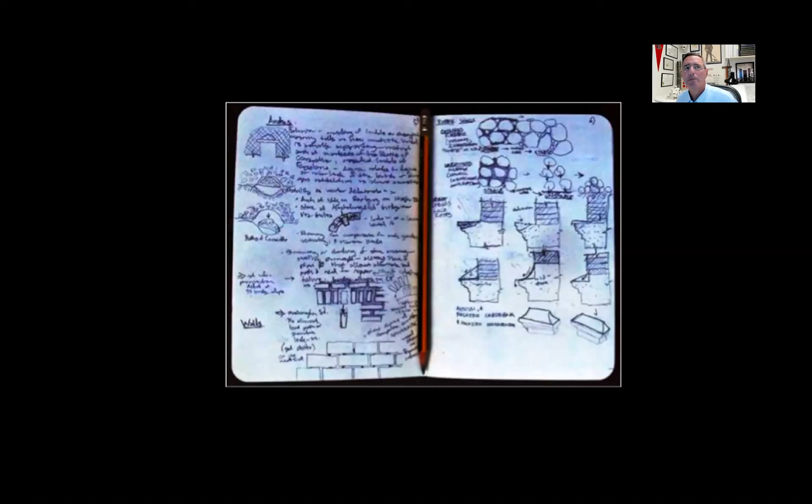His 10-month-long Rome research project was comprised of hands-on study of approximately 24 historic buildings in Italy, ranging from 1st century BC to early 20th century, including buildings by Bernini, Borromini, Moretti, and others. His hands-on research, often on scaffolds of buildings under restoration, diagnosed successes and failures in durability of construction detailing to derive lessons and general principles for designing buildings more durably, and hence more sustainably, today.

For the past 25 years, Matthew's practice at Simpson Gumpertz & Heger in Boston has focused on investigating and diagnosing causes and consequences of building envelope and structural problems in historic buildings, and designing sensitive and appropriate repairs and restorations to solve those problems. Matthew holds a BS in civil engineering from Tulane University, a master's from the University of Pennsylvania, and an MS in historic preservation from the University of Pennsylvania.

He's a fellow of the American Academy in Rome, a recognized professional of the Association for Preservation Technology International. Matthew has led several envelope investigations and historic design efforts on numerous historically significant buildings over the years, including National Historic Landmarks.

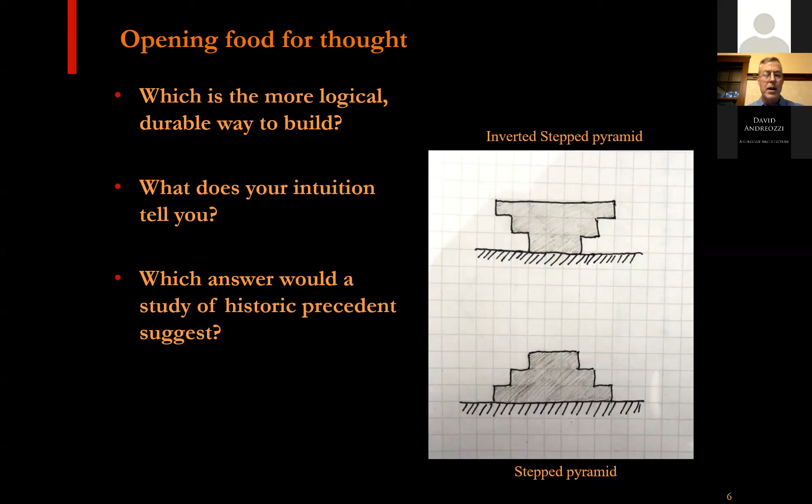Just a little opening food for thought to get the wheels turning. Here are two basic schematic diagrams: a step pyramid, or a wedding cake you might call it, on the bottom, and an upside down or inverted step pyramid on top. Which of these two do you think is the more logical, durable way to build? What does your intuition tell you? I think intuition counts for quite a bit. And which answer would a study of historic precedent suggest? Or more simply put, if you were to look back through the history of architecture, buildings in different countries and regions, which of these two do you think you'd see more of? So we're just going to let that steep, let that marinate, and we'll come back to that later.

Vitruvius was in my project title and was really the inspiration for my year-long research project on durability in Rome. I know this crowd knows Vitruvius well and doesn't need an introduction, but just as a bit of review: this was Marcus Vitruvius Pollio. He was born and died in the 1st century BC. We think of him today as a Roman architect, and of course he was, but it's important to remember that the hat the architect wore in ancient Roman times was really quite broad by today's definition. The Roman architect encompassed all the disciplines we think of today as architecture, engineering in its many forms: structural, mechanical, environmental, military. It also included urban planner, master builder. So there was really quite a lot to being an architect 2,000 years ago.

And of course, he famously wrote De Architectura, on architecture, around 25 BC. We know it very well, often called the 10 books today, although it was one book essentially with 10 chapters. We know it so well because it's the only surviving architectural treatise from classical antiquity, either Greek or Roman. But we know there were many others, and he actually describes them to us. He tells us he pulled the best from each of those works. So I think if one were to survive, it was really perhaps the best one, since he does survey, read, cover, and include highlights of all the others in his work.

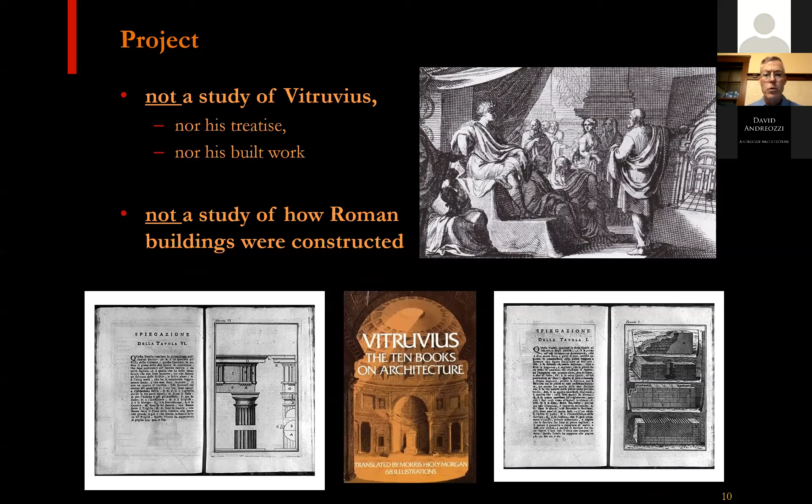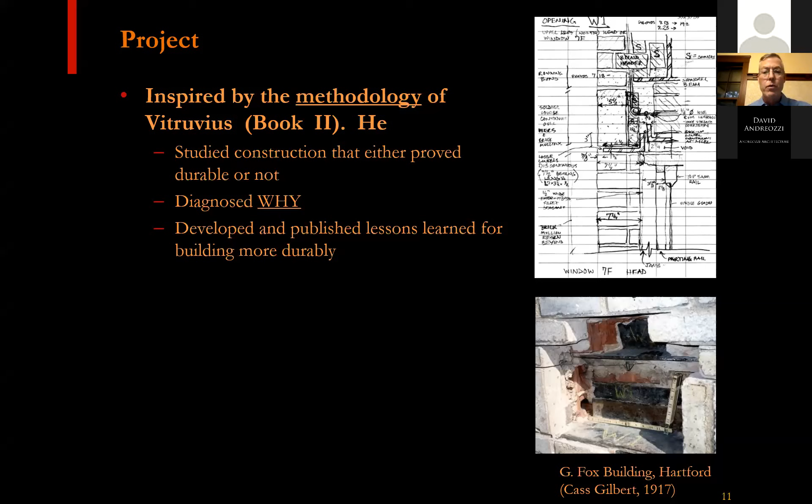So my project in Rome wasn't a study of Vitruvius per se, or his treatise, or his built work. And it was not a study of how Roman buildings were constructed, but looking at those was really a means toward the end. I was inspired by the methodology of Vitruvius, in particular Book 2. What he did and described in Book 2, if you remember reading this in college, was he studied construction that either proved durable or not durable, and he really put on his detective hat to diagnose why. From those lessons he figured out, he developed and published, in the manner of the day, scrolls presented to the emperor, lessons learned for building more durably moving forward, lessons for future generations. So I found this really inspiring.

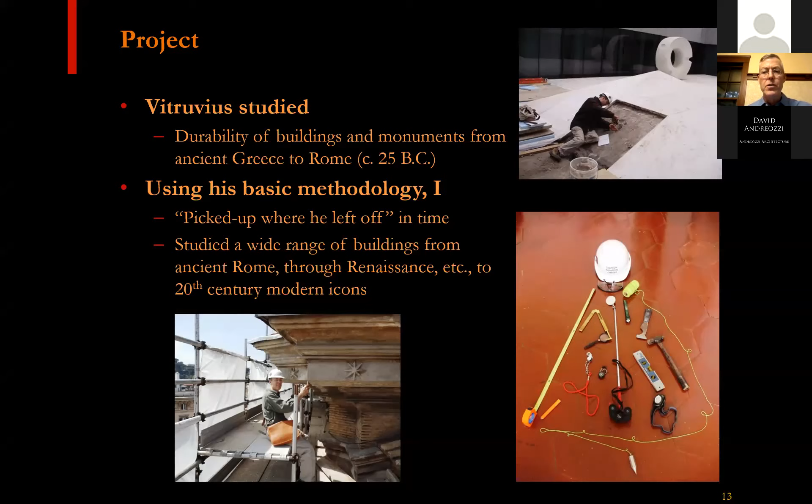So what I tried to do in my research project was basically use the same approach that Vitruvius did, and pick up where he left off in time. His work and his treatise concluded in the 1st century BC - that's where mine began. I picked up where he left off in time and looked at buildings from classical antiquity all the way through medieval, Renaissance, Baroque, early modern buildings, even early 20th century icons, looking at them closely, diagnosing why they had proven durable or not.

So I think, being here in Boston and New England, where this chapter is based, we're pretty fortunate in that it has such a rich architectural history for the US. We're looking back at buildings that are 200-some-odd years old in a lot of cases. But of course, Rome is a whole different order of magnitude and timeline in terms of building history - you're talking a tenfold increase in buildings that span 2,000 years roughly, rather than 200 years.

A different climate and a different tradition of construction and different predominant materials meant it was a great opportunity to test some of the theories I'd developed after practicing for 15 or 20 years, to see how they hold up in a different climate and a different tradition of building.

For those who know the Academy, I think my research project was a little unusual to a lot of the fellows I was there with. I had a hard hat and was up on the scaffold measuring things, while a lot of them were in libraries researching manuscripts for hours and hours. It was so different from what they were doing, and they were kind of fascinated by it.

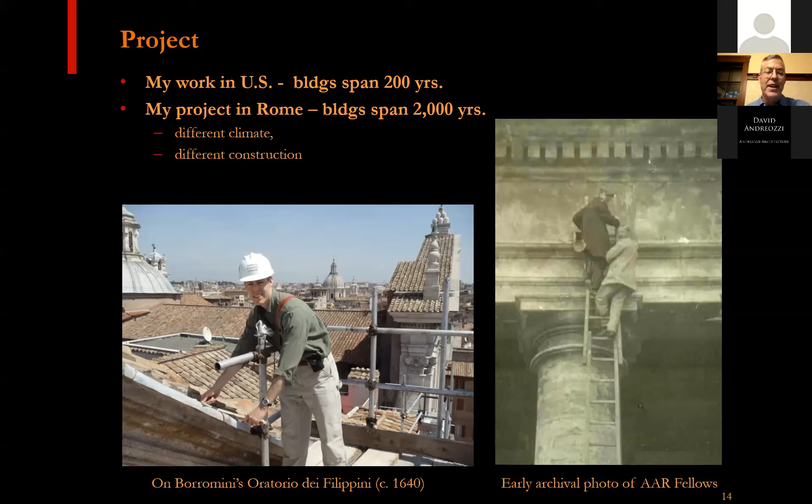But I pointed out to them that if you look at old photos of AAR fellows at the Academy—there's one from the Academy archives—they were really doing what I was doing. They were climbing up on ladders and scaffolds, measuring moldings. So to me, it was kind of a back-to-the-future type of project.

I couldn't bring all that equipment over there for a whole year and keep it away from my colleagues at work, and I wasn't about to ask permission—I certainly wouldn't have received permission to make openings in 2,000-year-old buildings. So how was I going to do this project?

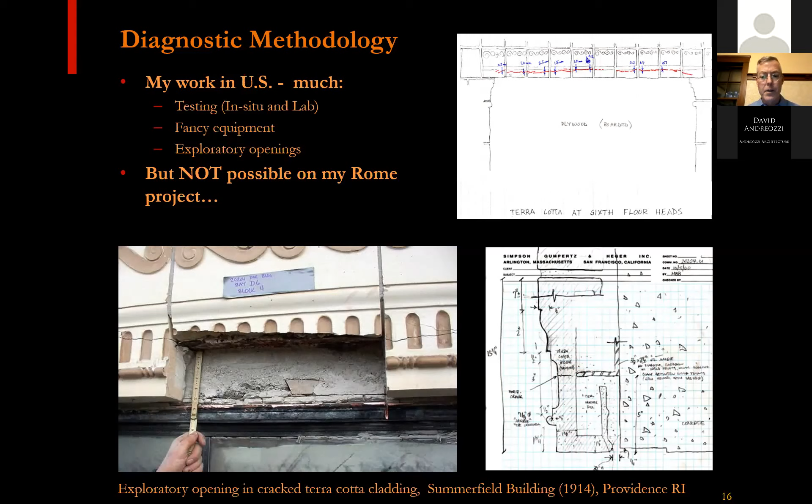Really, the methodology was like Vitruvius—kind of back to basics. It was a lot of looking really closely: looking, drawing, thinking, looking, drawing, thinking. How does this work? Why did that fail? How did this hold up and stand the test of time?

One of my partners, who teaches a lot of us how to use non-destructive testing equipment at SGH—some very sophisticated, expensive gizmos—likes to remind us that the two best tools you have on any investigation, you always have with you: your own two eyes. Just looking very closely and thinking about something is incredibly valuable.

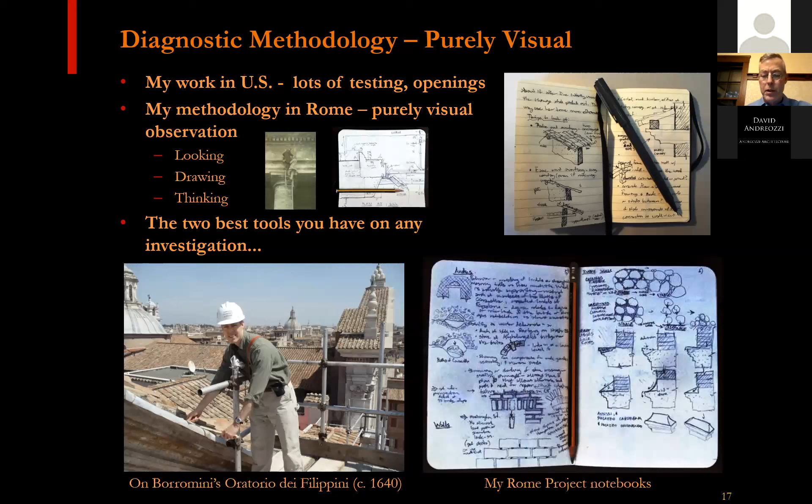I think there was really a need for this research on durability, and still is. In preservation, part of my background, there's a lot of research at the micro scale—the tiny scale of microscopes, looking at materials up close and understanding slight differences in chemistry. And there's a lot at the macro scale: what are the character-defining features of this building or even this whole district? But there's not enough at the intermediate scale.

By the intermediate scale, I mean the scale of a window, a corbel, a bracket—the elements of how you actually put a building together, how wall meets window, how roof meets wall. That intermediate scale is really critical, and in my experience, that's where buildings really either do well or fail in terms of their durability.

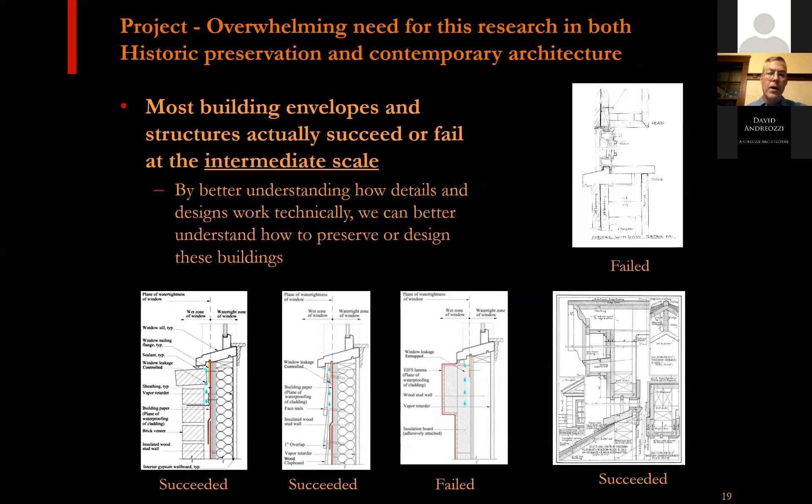To make that point, here are a handful of different window details. At a glance, it wouldn't be totally obvious why roughly half of these succeeded and roughly half failed miserably. So it's important to look really closely and get into the nitty-gritty of how you bring different materials together, how things lap, how things get integrated, how things meet with respect to the weather.

Another reason I felt this was really important is I see us in the midst of a durability crisis in architecture, engineering, and construction. There's really a pandemic of enclosure failures that I see from high-end, very expensive projects to the low end, from renowned to unknown architects, coast to coast—and many are failing immediately or very shortly after construction.

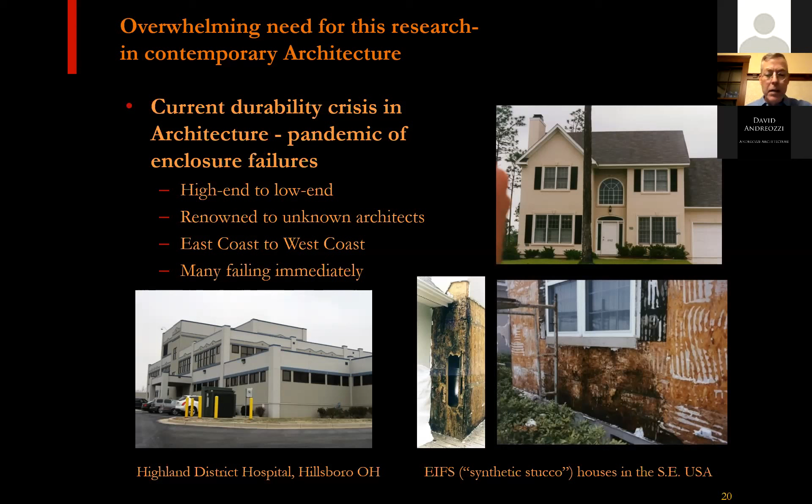So anything from McMansions and spec-builder EIFS houses that you see here on the right from the southeastern US, to this regional hospital in Ohio that I was investigating that was leaking badly and had a lot of problems even before they were done punch listing it, to the very high end, famous architects, significant commissions and talented teams of consultants too. It's not my point to blame these, it's just to say this is such a widespread problem that is spanning the entire gamut of big projects to small and everything in between, coast to coast.

Another reason I felt this research on durability was really important is there's been so much focus, and rightly so, on sustainability over the last 25 years. And in my mind, durability is absolutely fundamental to sustainability. So we can't really talk about designing and building sustainably if we're not talking about designing and building buildings to last 100, 200, 300 years.

So if you look at a building that's a couple hundred years old, like Palazzo Braschi at the upper right, or maybe around 500 years old, like the Villa Medici at the lower left, think of all the embodied energy and material that has been saved by not knocking down a building every 50 years for 200 or 500 years and starting all over again, quarrying or manufacturing new materials and transporting them to the site and erecting them. Think of how much you're saving.

One really good study looks at just this, looking at sustainability from the broader lens of the total impact on the planet of knocking down a building and building a super energy efficient building to replace it, versus making some improvements, not getting it to the greatest performance energy-wise, but keeping what you have. Kind of the greenest building is the one that's already built notion.

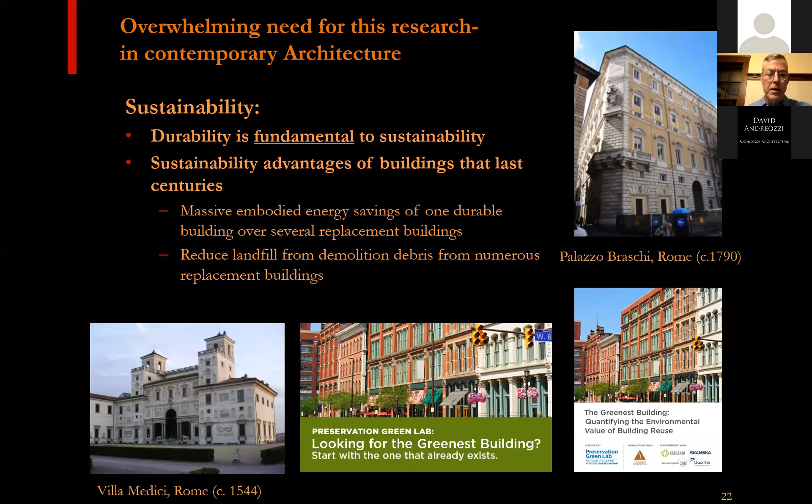So clearly we have this crisis in durability, but why? It's despite the decades-long emphasis on sustainability. So I see several reasons for this.

One is that aesthetic innovation, kind of the constant push for aesthetic innovation in architecture, forces us to innovate in our detailing. We want something to look a different way. We have a new material, a new membrane, a new frame element or whatever coming out, and we have to figure out how to detail that for the first time. It's possible, but certainly not easy, to get it right when you're detailing something for the first time. You're just starting to get to know a material or component, or how to bring a couple different unknown materials or components together. So that's understandable, but I think we're forgetting some fundamentals, first principles, and real basics of designing for durability. That's really what I'm going to try to cover today.

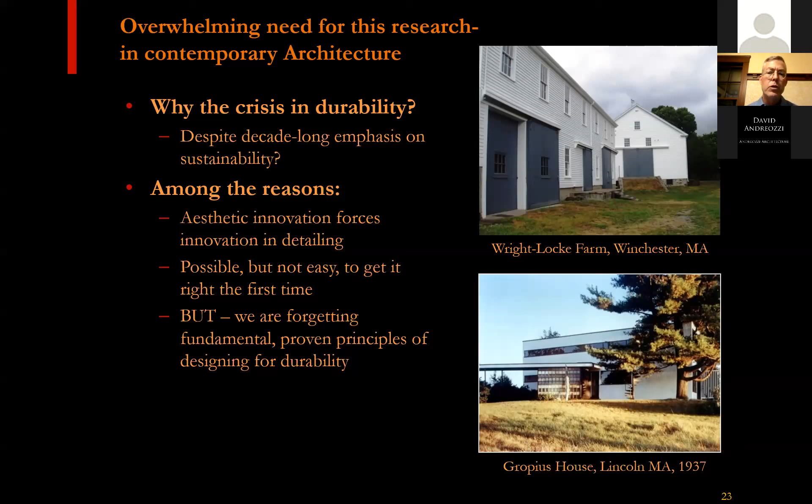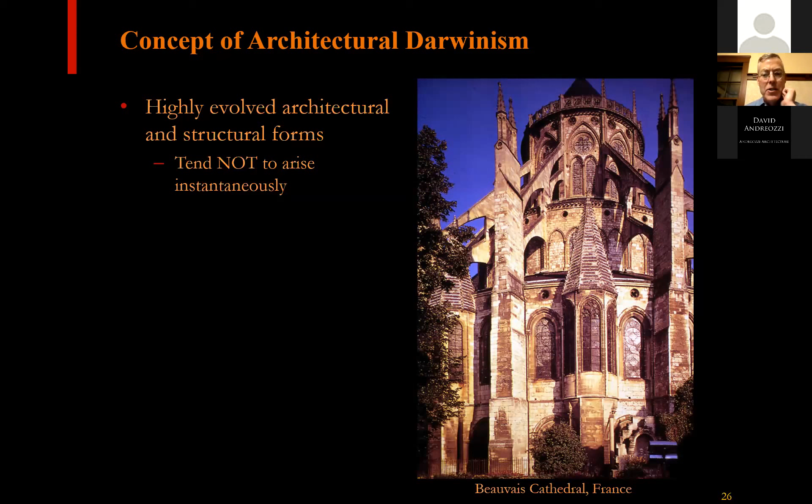So why is that? Well, in my mind, this comes back to this concept of architectural Darwinism. I've used that term to describe this kind of process. A highly evolved architectural or structural form, like a Northern French Gothic cathedral, you see Beauvais here, does not tend to arise instantaneously. It's not this genius lightning bolt idea that comes out of the sky straight into the hand and through the pen and onto the paper. That's not really how highly evolved architectural or structural forms happen.

What tends to happen, how you get a highly evolved form, is more like a gradual evolution, a series of baby steps that eventually culminates in that. So we don't just go straight from squat medieval structures to Beauvais Cathedral. There are some early Norman buildings that are starting to open up, get less solid, less massive, get a little bigger. They come up with the pointed arch as opposed to the Roman arch.

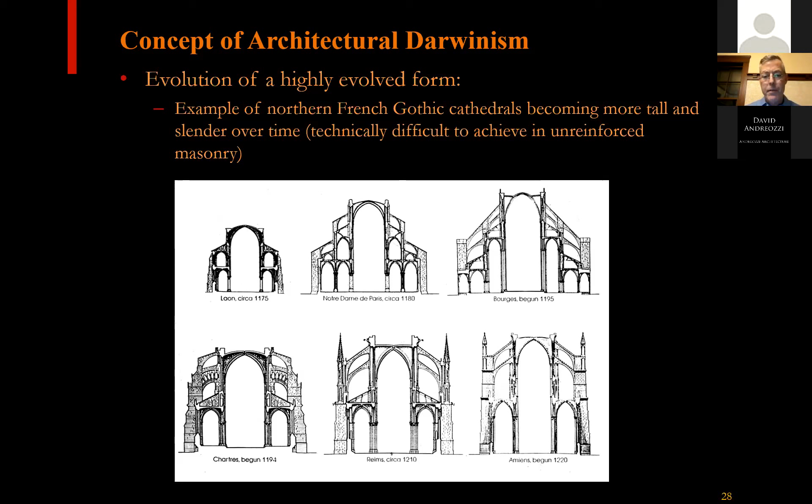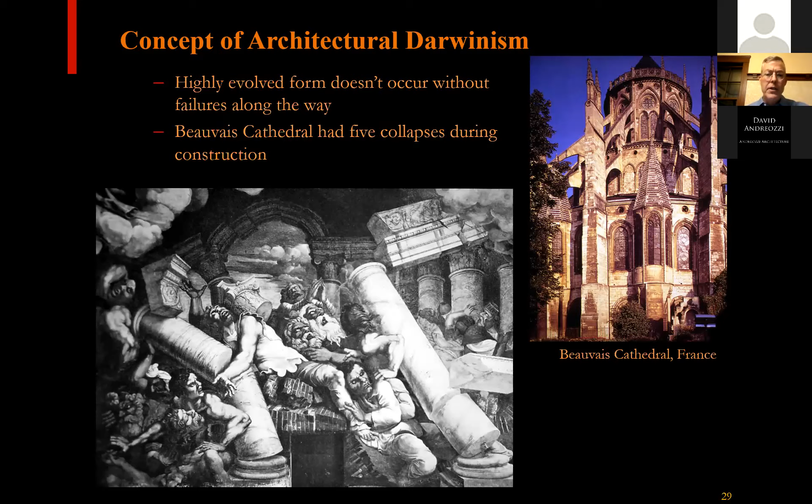And that doesn't happen without some bumps in the road, figuring things out along the way. Beauvais Cathedral alone had 5 collapses documented during construction. So there's some trial and error. People make mistakes, they figure things out, and they eventually get it right. And they don't always get it right. Some things are failures. So over time, only the best survive intact.

So when you look at a highly intact historic or ancient building today, like the Pantheon in Rome, or a structure like Pont du Gard near Nîmes, France, that's survival of the fittest. Those are among the best that have withstood time and the elements for 2,000 years and are remarkably intact. They were so well designed and built.

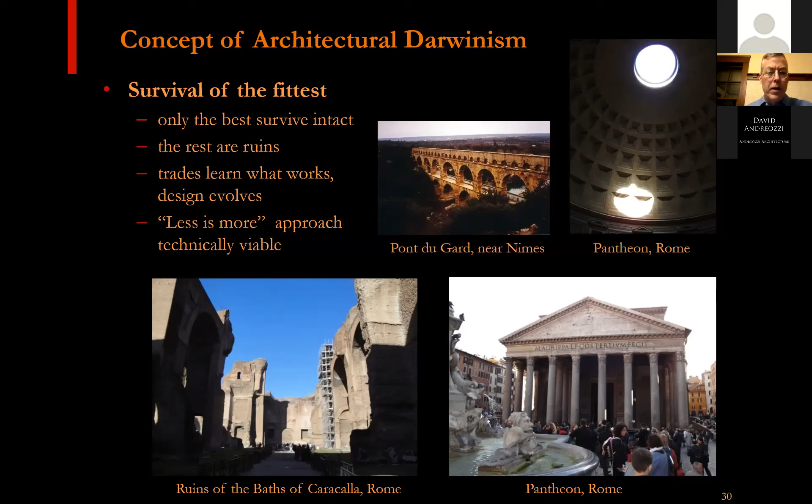So if a building was poorly built, it would wind up in ruins. And it's important to remember that not everything that winds up in ruins was poorly designed, because many buildings in Rome that were really well designed wound up in ruins just because they became quarries essentially for later generations to pull stones from, to pull materials from.

So I would diagram this process of architectural Darwinism like this, with time moving from left to right. You have either a new material, a new form, or a new method of building that's tried out. There's some trial and error. There are partial or even wholesale failures. People learn from those failures, both their own and from other people trying to do the same thing, like in northern France when people are building the Gothic cathedrals.

And then time passes. Some viable techniques and details evolve and become known. And then time passes again, and time weeds out the lesser of those buildings, and the better ones survive - survival of the fittest. So we come along 2,000 years later to work on Maison Carrée or the Pantheon, and it's a really fundamentally sound design.

So our typical preservation approaches, like less is more, really don't change anything, do as little as possible, etc. Technically, those work pretty well because those buildings are so inherently well built and well designed.

So just to overlay on this - what happens with modernism? We come along with, again, new materials, new forms, new methods of building in the early 20th century. That same trial and error occurs, and people again don't get it all right the first time. But there isn't enough time to really learn all the lessons from those, digest them, and assimilate them into our design and construction culture before we're moving on to the next thing and someone else is innovating with something else.

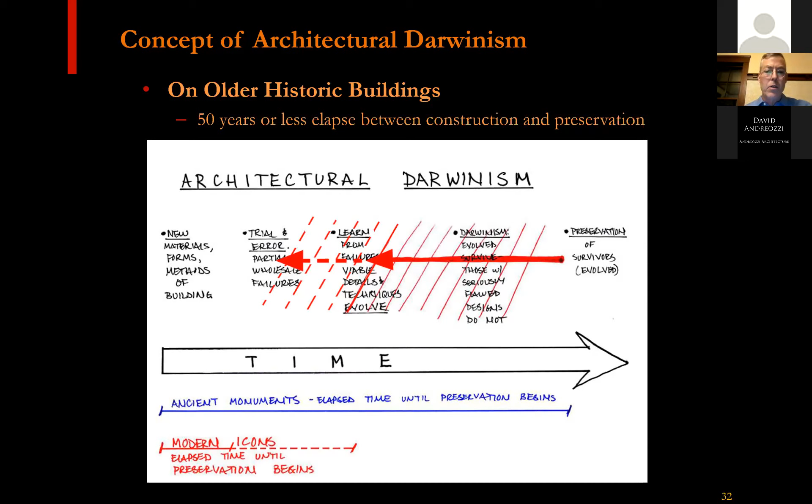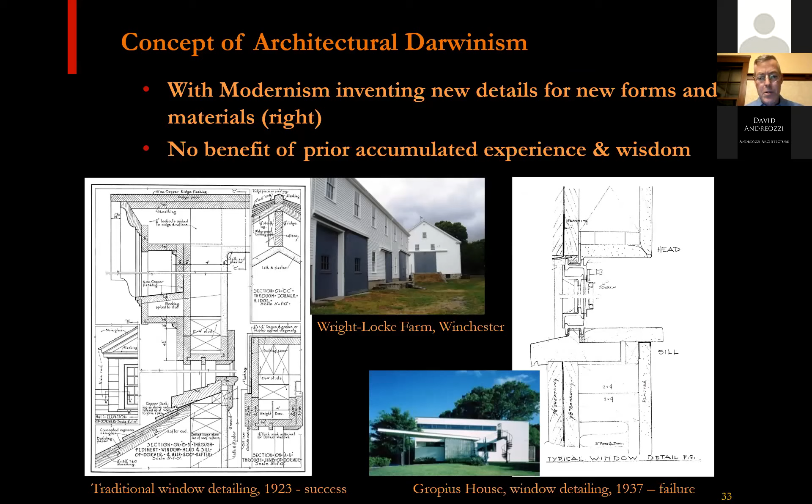Long story short, this was one of the failures. When we went back to restore that building in the 1990s—it was only 60 years old at that time, which is not old for a wood frame building in New England—it was really in pretty tough shape as a result of bad window detailing and a lot of leakage.

So that's the concept of architectural Darwinism, and that's what makes it so difficult. I'm going to take a couple specific construction details that I studied in Rome. I studied many more, but we just don't have time to share them all. So I picked two for tonight, and I'll break those down and understand why those traditional details that evolved over time and became well known to builders and architects work so well.

The two I'm going to share with you tonight are these common facade forms on the left and the typical roof eave detail on the right. One of the reasons I picked both these details is they're just so omnipresent across so many different centuries. You can look at buildings that are 500 years old, 200 years old, 100 years old, even less, and see these types of details on the left—projecting band courses, window heads, sills, all this articulation of the facade—despite changes in other stylistic motifs during that time.

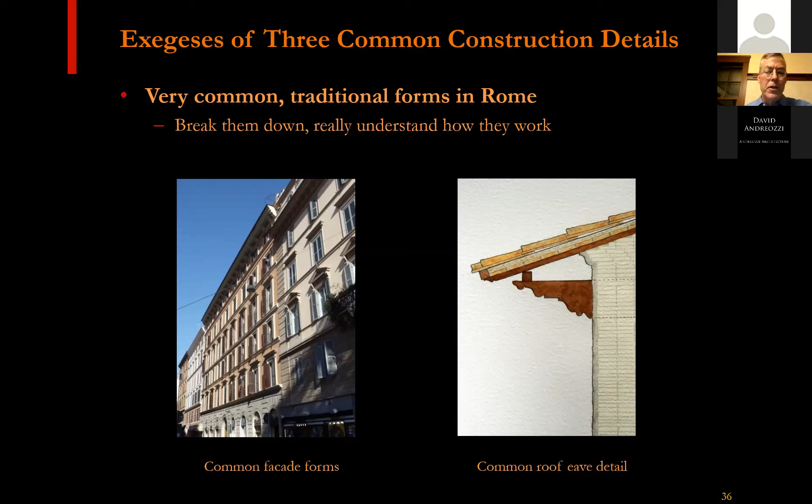The same thing with this roof-to-wall detail—you'll see buildings spanning 2,000 years that have a detail very similar to this. I think it's often a hint: when you see something done across a period of time that transcends many different styles, there's usually a good reason they're doing it that way. So let's take a closer look.

First, the facade form. Again, look at the shadows on the right. You see that at every floor line, you've got that strong ledge or band course. You've got these big window hoods that project out, big sills, a big overhanging cornice. Why do so many different buildings in different architectural styles from different centuries have these same features? Are they decorative, or are they functional in some way?

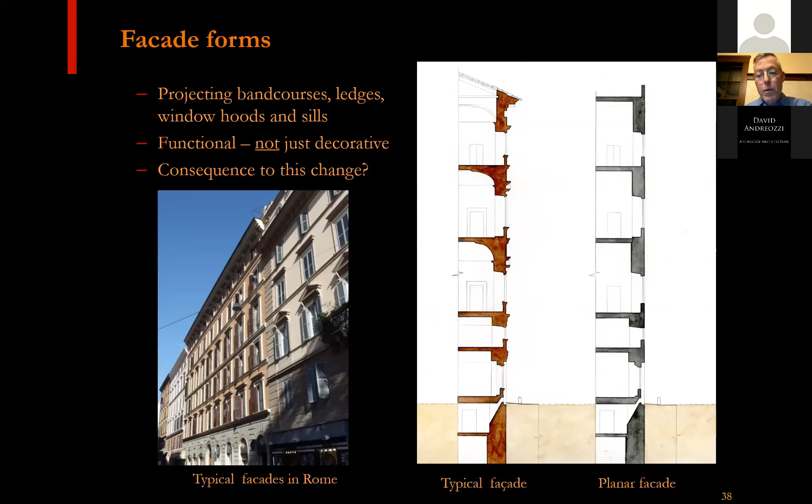So that roof overhang goes away and you have a parapet, all those ledges and band courses at the floor lines go away, the sill and window hood projections go away. So if all that goes away, if they're purely ornamental, there would be no technical consequence for doing this, right? It would just be aesthetic. But my point is they really are doing something for a living, and here's how and why they work.

So if you think about it, these are mass masonry walls, load-bearing walls, very thick brick or stone, and the floors all frame into them and carry the weight down to the ground. A lot of these buildings in Rome are 60 or 70 feet high pretty routinely.

So what really happens with these walls is you get that gradient of wetting. It's worse the farther down you go on the building, and after it's rained a certain amount of time, that water comes through at the inside, either as free water leakage or as moisture that blisters your plaster, peels your paint, and causes other moisture-related problems. So how do you make this work?

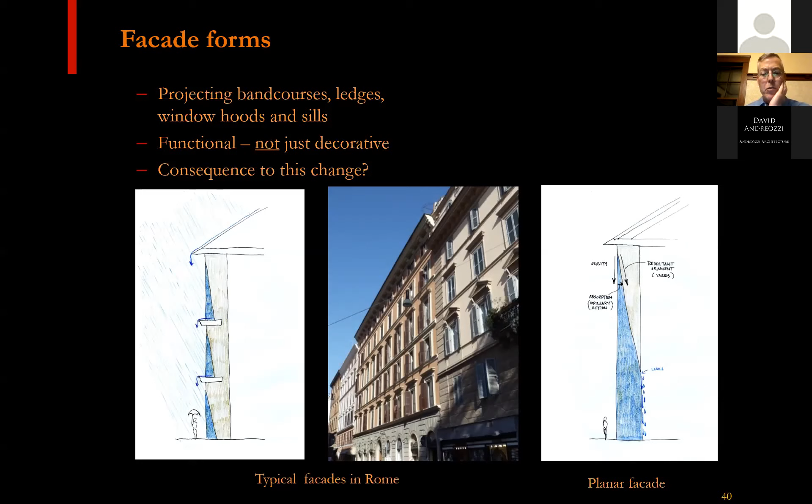Structurally, to make those out of stone, you have to set them into the wall, cantilevered in. With just a slight wash slope on those stones, they essentially act like a flashing and get that water out. They're essentially resetting the clock at every floor line, so you don't get to the point where the water works its way all the way through. You get individual triangles at every floor of wetting rather than one big soak-through. So they really are functional.

Here's a medieval building, essentially a fortification from the 10th to 12th century, where they did not have any of these features. This building isn't 60 or 70 feet high, it's more like 25 or 30. But without any of these features, you can see at that inside corner, the same corner shown on the exterior on the right and interior on the left, all the moisture-related damage there without having any of those features on the inside.

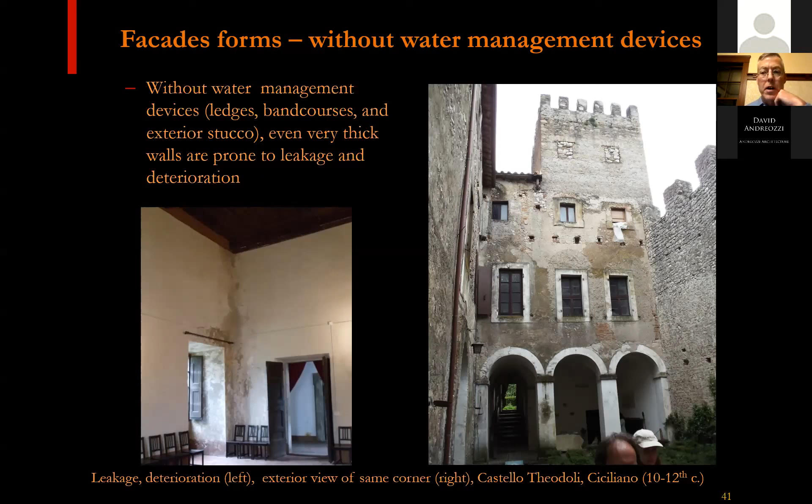So even very thick walls without these features are not immune to leakage and moisture-related damage. And this goes back 2,000 years now. At Ercolano Scavi, a town like the more famous Pompeii, buried by the eruption of Mount Vesuvius, I love going there because you can see some incredibly intact construction details and buildings, even beyond what you can see in Pompeii.

This kind of pent roof I'm showing here on the right, with a close-up on the left, you can see the clay tile are actually built into the stone wall on just this little pent roof, a very short roof that just projects out a foot or two. So why would you go to the trouble of building that all the way into the wall? You can see there's a section drawn at the upper right that's much more of a pain to build.

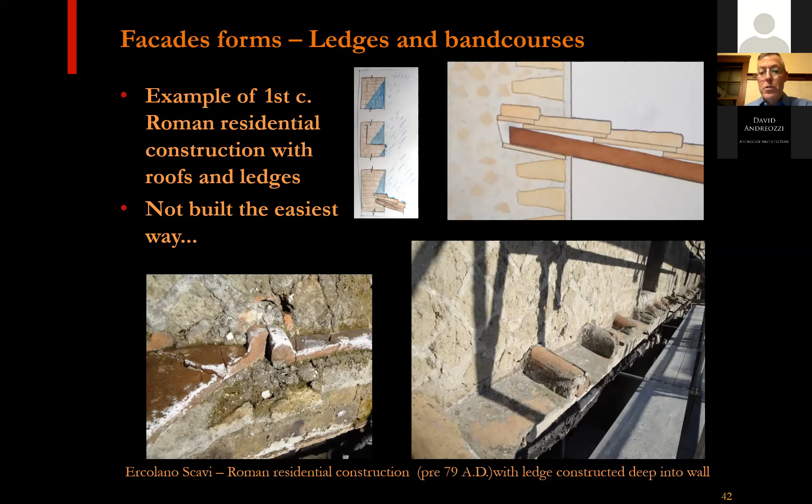Any builder would say, why don't I just build the wall straight up, and then later just nail a wood ledger on there and hang your roof on it. That would be a lot easier to do sequence-wise. But they took the time and trouble to build the wall up, stop, build in these clay tiles deep into the wall, and then continue on up. This is essentially functioning like a flashing, catching water that's getting into the wall and bringing it back out again. The fact that they'd go to this trouble during construction tells me they really understood how this worked and why it was important.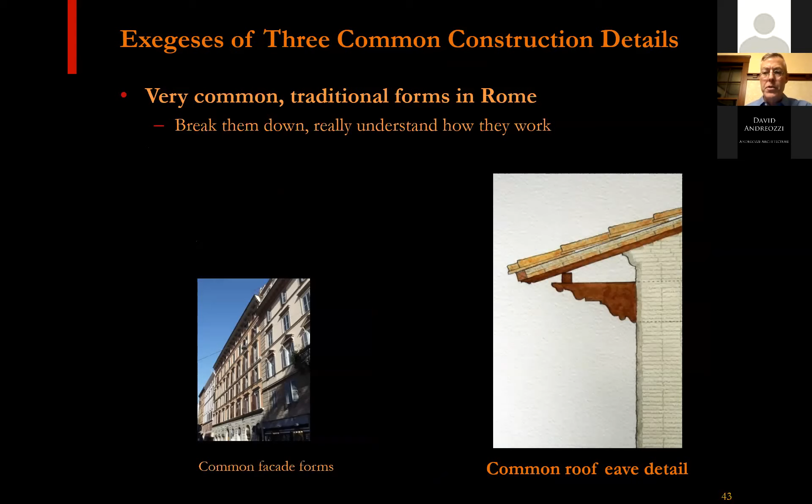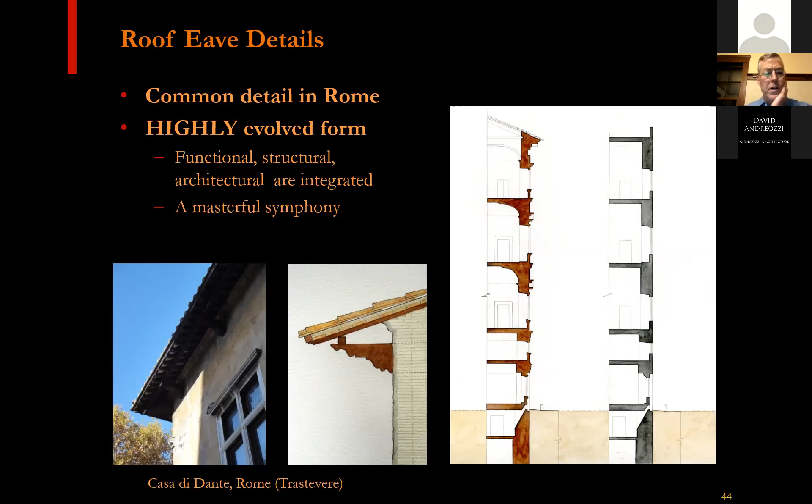The second detail I'd like to break down is that omnipresent roof eave detail seen across 2,000 years of buildings in Rome and the central Italian peninsula. That drawing is from the Casa di Dante in Rome, a late medieval building in the Trastevere neighborhood, shown at the lower left. The main element with the scrolly cut sticking out of the wall is usually a blocking member underneath the attic roof truss or the main floor beams, about 10 feet on center. You can see those poking out on the facade in the photo at the left. There's a continuous rail spanning between those, with rafters landing on them at about a foot on center. It's a beautiful detail. A lot of people think it's ornamental. So is it just ornamental, or is it functional in some way?

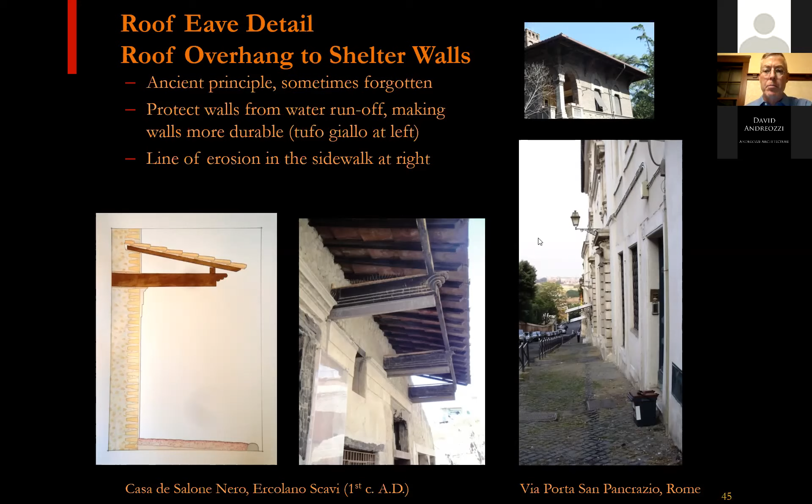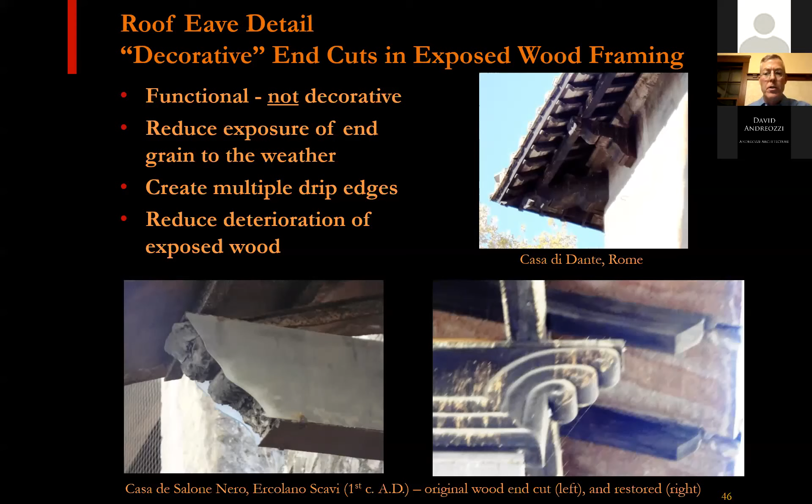This corbel cut beam end is really not decorative - you see it from the 1st century AD all the way up to the McKim Mead White building from 1912, which had a very similar detail, spanning 2,000 years. Here's how it really works. Cutting that beam off, you might wonder why they didn't just cut it straight off instead of doing that decorative shape. Well, in terms of structural form finding, you have a cantilever with a point load at the end, so the form that wants to exist structurally is the moment diagram, which is that triangle shape. They've cut it off leaving exactly the form they need structurally. You might think, why not just leave it uncut? The thing is, if you leave it, you have end grain exposed to the weather, and end grain wicks moisture in through capillary action. I've seen houses here in the US with beams cut off straight without a gutter, and this is exactly how it rots - it's the same gradient.

Gravity pulls it down, capillary action pulls it in. The resulting gradient is triangular, and the lower half rots. So there's actually a beautiful synergy here where the part you want to cut off before the cancer spreads is the part you don't need structurally. So you really do want to cut that off, and that leaves you with exactly the form you need structurally.

So then you might say, well, why not just do a simple diagonal cut? Why do you need all those little curls and turns? The thing is, if you look at the photo, or my watercolor sketch in the middle, the roof overhang is really shielding this from the weather pretty well. So even in a 45-degree wind-driven rain, you wouldn't be getting water on that wood member. But in a horizontal wind-driven rain, when that does occasionally get wet, what you really want to do is get the water off it as quickly as possible. So essentially, these cuts that might look ornamental really build in a whole series of drip edges so that when it does get wet, it drips and it dries very quickly.

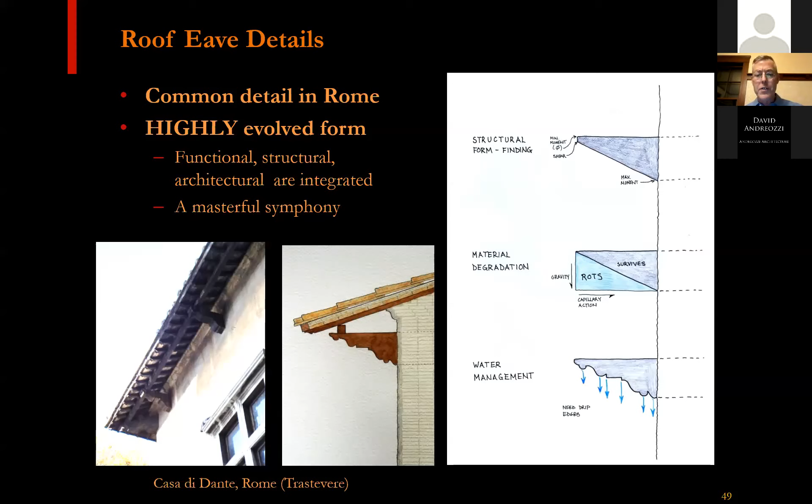They're usually pine and occasionally chestnut. So how do you keep a non-decay-resistant wood in a rainy climate alive on the exterior for 200, 300, 500 years? It's really the way this is configured and detailed that leads to its success.

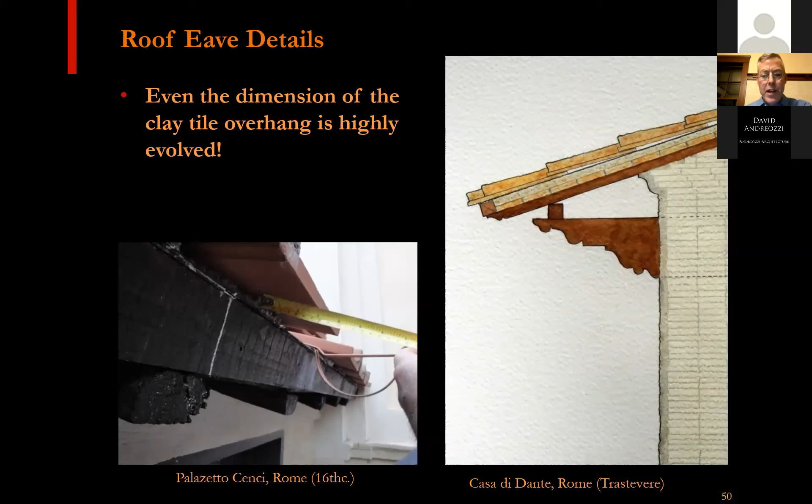And even the tiniest dimensions, like how far does the clay tile overhang that wood rail at the very end? This is a very rustic example from the courtyard of the Palazzetto on the left. One of the first buildings I was up on, the roofing foreman told me that overhang, how far do you overhang it? And he said, this has to be about 7 centimeters, which is about 2 3/4 inches.

And what he explained to me is if that dimension's too short, what happens is all the water curls around the clay tile and it comes back and wets the wood and the wood rots. And if that overhang is too long, then someone puts a ladder up to it or someone steps on it and it breaks off. So the just right, the kind of Goldilocks dimension is about 7 centimeters, which is about 2 3/4 inches. And there's the foreman, Comon, who explained this to me during his re-roofing project.

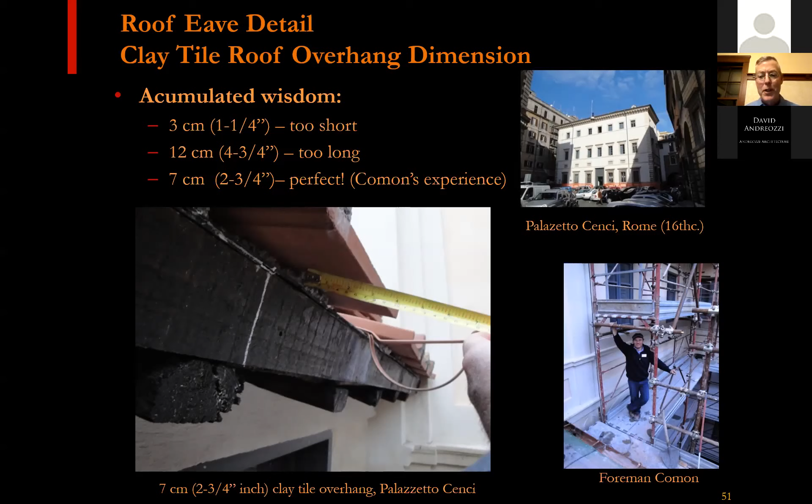Sure enough, that was one of the first buildings I got up on all year through the kindness of RISD. Thank you, David, for letting me up onto that building where they have their architecture studios in Rome. Every other building I measured as soon as I got up there, that clay tile roof overhang, including much older buildings, much newer buildings, buildings by Borromini, and right on every time it was right around 2 3/4. Everyone had that perfect dimension.

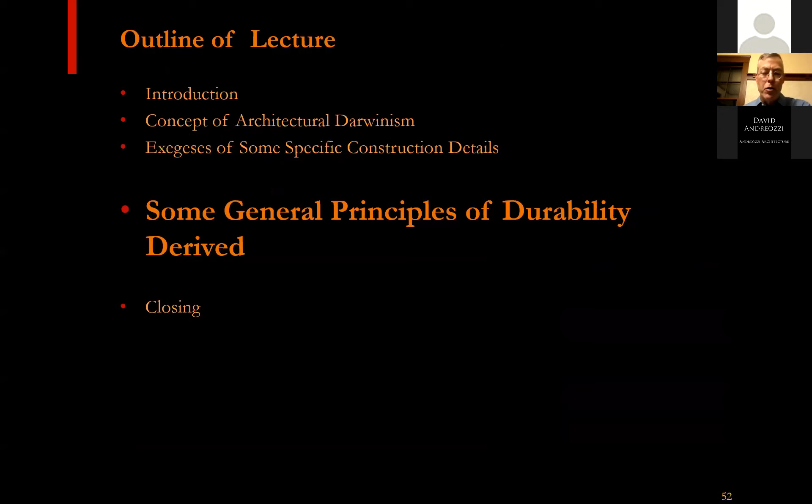Taking just a second here, I'll now pan out. So looking at these and many, many more individual details like these in Rome, at the end, I extrapolated out, what are some general principles of designing for durability that I can derive from all these individual lessons. So that's what I'd like to share with you now.

So here they all are, but I'm going to first come back to that original question. Which of these is the more logical, durable way to build? Is it the inverted step pyramid, upside down? Please feel free to throw your thoughts in the chat. Or is it the kind of step pyramid or wedding cake shape on the bottom? Your intuition, kind of represented by these children's blocks, might say, well, it seems a lot more durable or maybe more structurally stable to do the step pyramid.

And if you were trying to think of my question of which of these would you see more examples of if you look back through the history of architecture, maybe you thought of a step Mayan pyramid. It might be hard to think of examples offhand of the inverted step pyramid.

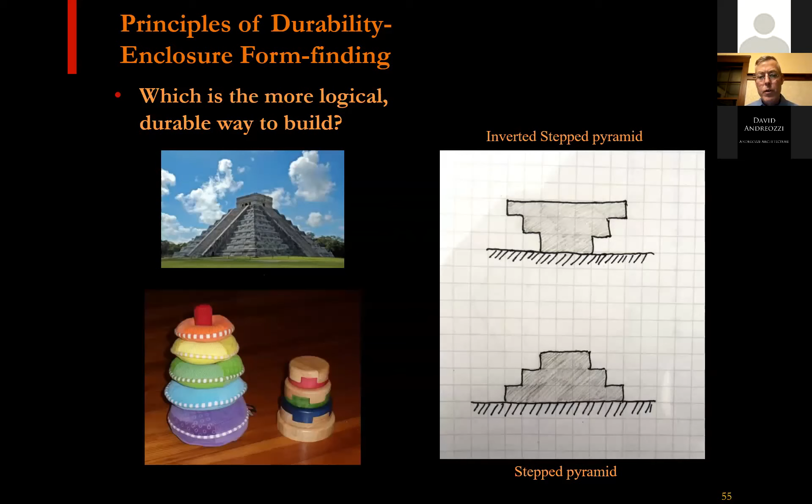So really, the answer is the inverted step pyramid is the more logical, durable way to build. And to explain why, I'll show you these diagrams.

Designing for durability is really all about managing water. It's one of the most essential things no matter what climate you're in—if you're in Rome, the cold northern states with significant freeze thaw, or the Mediterranean or California where they don't. Water is still the foremost agent of deterioration, so designing for durability is all about managing for water.

The step pyramid is structurally very stable, but the downside is how it manages water. If you think about a 45-degree wind-driven rain on our wedding cake, every surface, every transition from vertical to horizontal, is just getting pounded by the rain. Every place has to have a perfect watertight assembly to keep it all dry—it's very challenging to detail.

If you think about the inverted step pyramid, Boston City Hall might be one example that springs to mind if you're here in the New England area. Maybe it's hard to think of others, but the way this works well in terms of water management is you're shedding and sheltering.

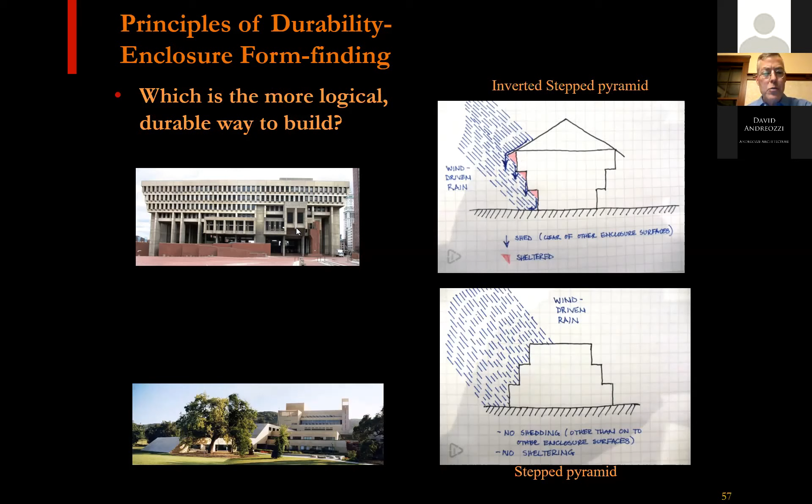So Boston City Hall, okay, there's one example, but do you really see examples of the inverted step pyramid in older architecture? Here, a couple blocks away, is the Paul Revere House, the second oldest building in Boston, 1680 to '83. It's more subtle than my diagram, but there it is—if you look closely, you'll see that overhang at every floor level, including the attic level, and even a little jog out at the foundation.

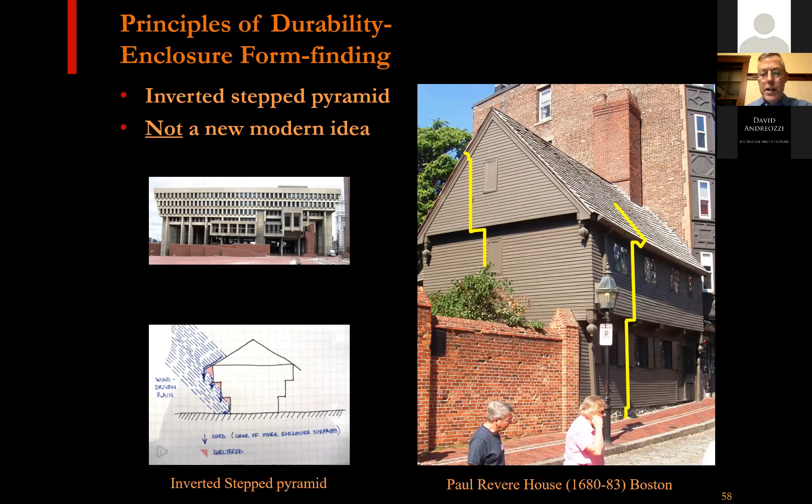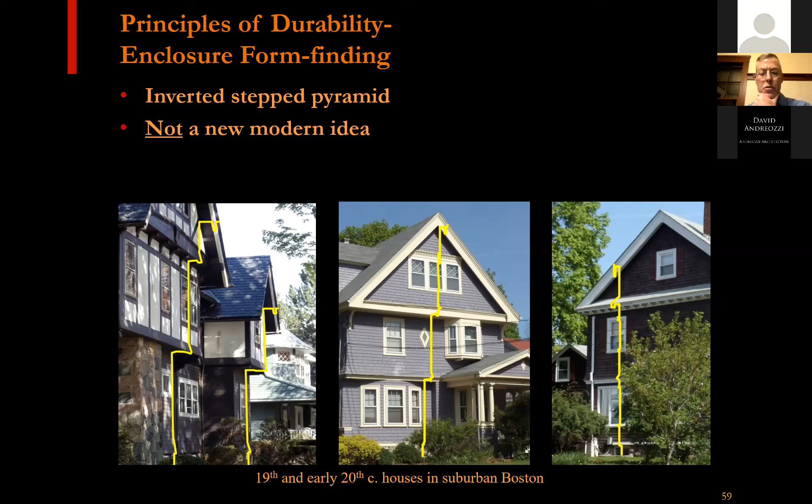It's definitely there. Now that I've seen it, I walk around and look at older traditional buildings of many different periods and styles, and I see it again and again. An early 20th century Tudor revival on the left, a Queen Anne in the middle from the late 1800s, a Greek revival on the right from around 1840 or 50—they often have this general enclosure form. If you look closely enough, you'll see it.

It works really well by shedding and sheltering. A lot of it goes back—you look at the Tudor revival example here, and you'll see this again and again on older Tudor Elizabethan cottages in England, but also older buildings in the Alps, in Bohemia, have this type of form. I think there's a myth that you see this because people were just living all on top of each other in the Middle Ages.

They were trying to eke out just a little bit more space in dense, crowded cities. But this 15th century cottage in Sussex, England—photo from my friend John Fidler—was built in the middle of a meadow, and it had these features too. You see this in very rural buildings as well; it's not confined to the city. So that busts the myth that this was just to gain extra floor space. I think they really knew what they were doing, and it was about water management.

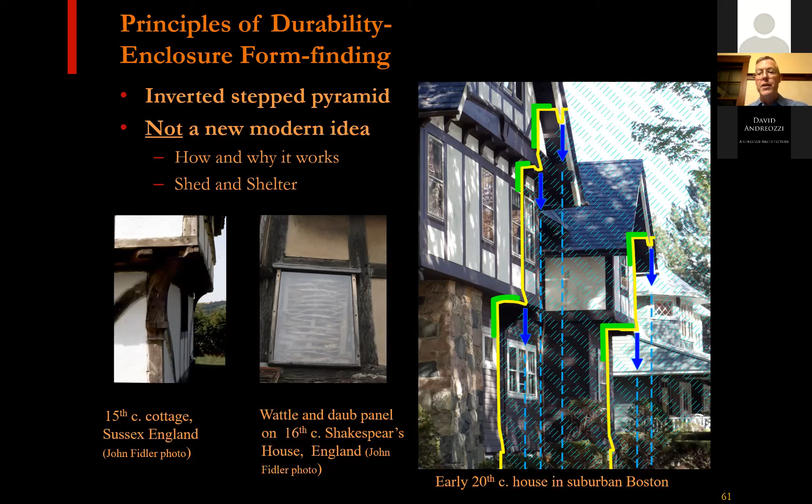When you take materials like untreated wood that's not naturally decay resistant, or wattle and daub—which is essentially wicker with clay or lime-based plaster in it, as you see in the second photo from the left—you get that wet for very long and it just falls apart, turns to oatmeal. So you need an overall enclosure strategy and form that gives it a chance to succeed. And that's what the inverted step pyramid does in all those climates and regions—in England, in the Alps, in Bohemia, you will see it again and again.

And even in Venice, there are some really great examples. Here they have masonry buildings, some of which are even corbelled out on timber framing, as you see in that second from the left photo, to create that overall building form.

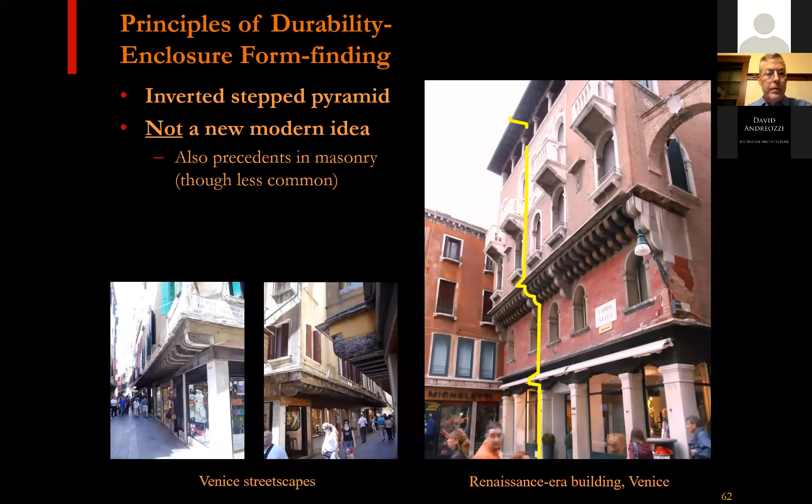So there are other ways to shed and shelter, and other variations on this theme.

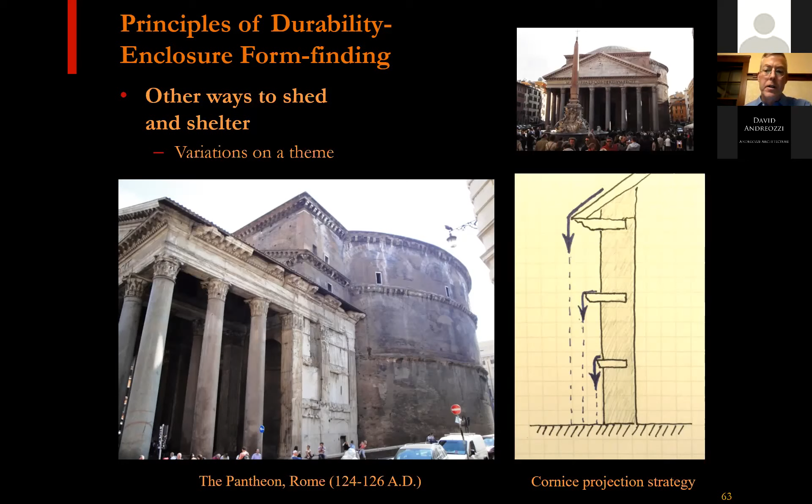So the Pantheon, if you look at the measured architectural and archaeological drawings of it, the wall is planar, but the band courses at the different levels, even though they're chipped away and eroded, the reconstruction drawings all clearly show that they actually step out a little farther as you move up the building with height, as schematically diagrammed on the right. I think here even, is that same idea that you want to shed water all the way to the ground and not just dump the problem on the floor below, not just kick the can down the road.

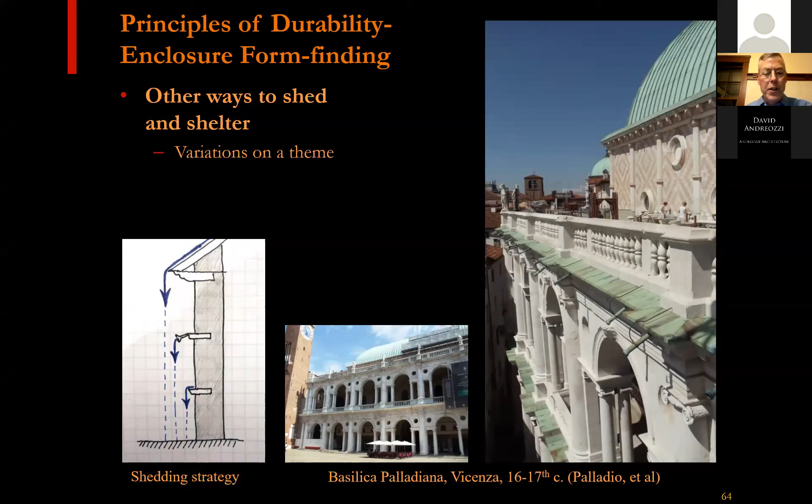Yet another variation on this theme, the Basilica Palladiana, Palladio's Basilica in Vicenza. Here, the walls are planar, those copper-clad ledges are planar, and then these, what the Italians call doccione, which is like a big shower, almost like that big copper scupper, you can see project out farther at the higher levels than at the lower levels, again with the idea to clear that water all the way to the ground. So several variations on the theme, different ways to get there, but all with the same overall goal of water management, shed and shelter.

And if you look at many other details, such as window hoods, those ledges, those band courses, the roofs overhanging the walls, these are all details that are about managing water, shedding, sheltering, protecting the most vulnerable areas, protecting materials that are less durable in their own right, like wattle and daub, like stucco on soft brick, like soft stones like tufa, etc. So all about water management.

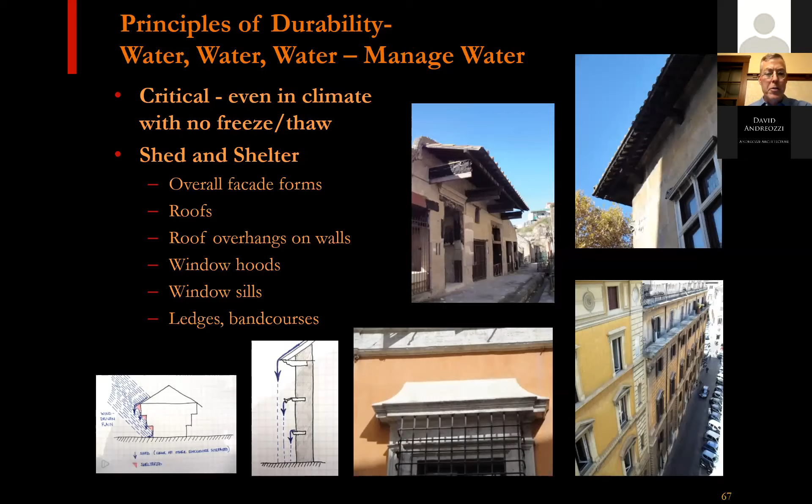So the first principle, in summary, is water management is paramount. Do everything you can to manage water. The second is put each material in a position to succeed. What I really mean by that is not everyone can afford, and not every project and not every budget can afford the best materials everywhere all the time. So you really have to think about allocating your budget towards putting the right materials in the right places. I thought a great example of this was this whole little town of Ercolano that was buried by the eruption of Vesuvius.

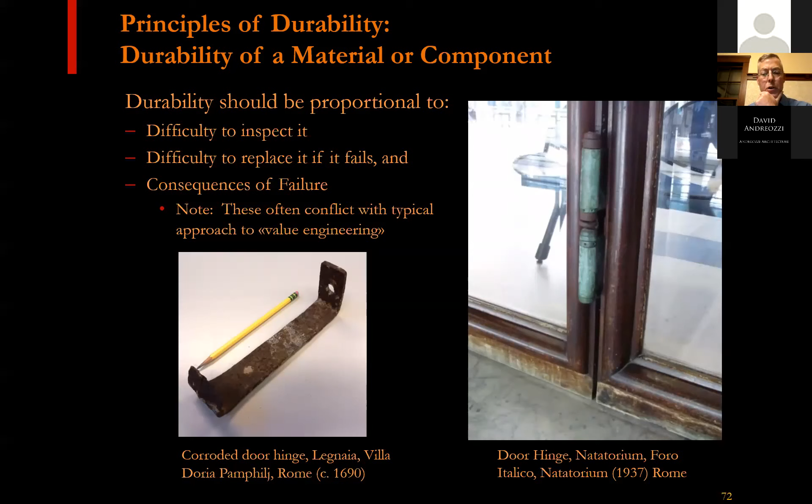On the left, you see another corroded door hinge, and this was from a very rustic kind of wood shop in a villa at a farm. Again, same thing, it's pretty corroded, but it was easy to see, easy to inspect, easy to replace, so no one got hurt if it failed.

I would note that this idea of putting precious, expensive, durable material where no one sees it conflicts with the typical approach of value engineering. What often happens is the person doing the value engineering thinks it's their job to take money out of the project where no one will see it. But often you need to spend the money in the places you don't see, because those are the hardest places to get to, hardest to inspect, and hardest to replace something if it fails. You're much better off putting the less expensive material where it's easier to replace later.

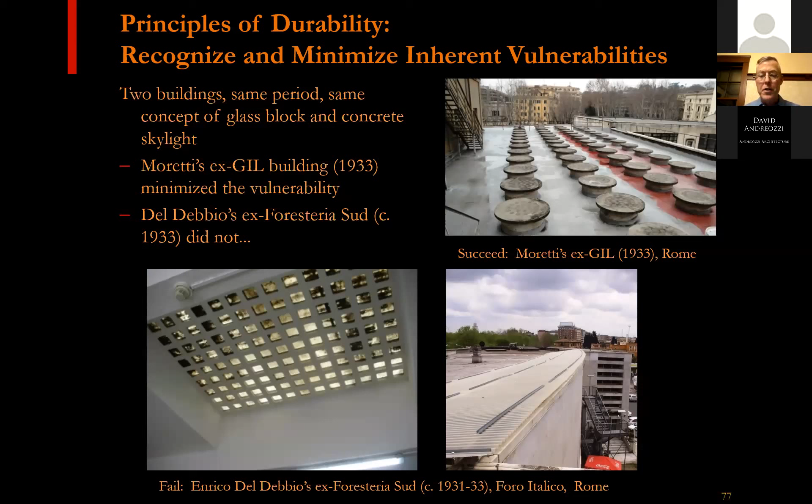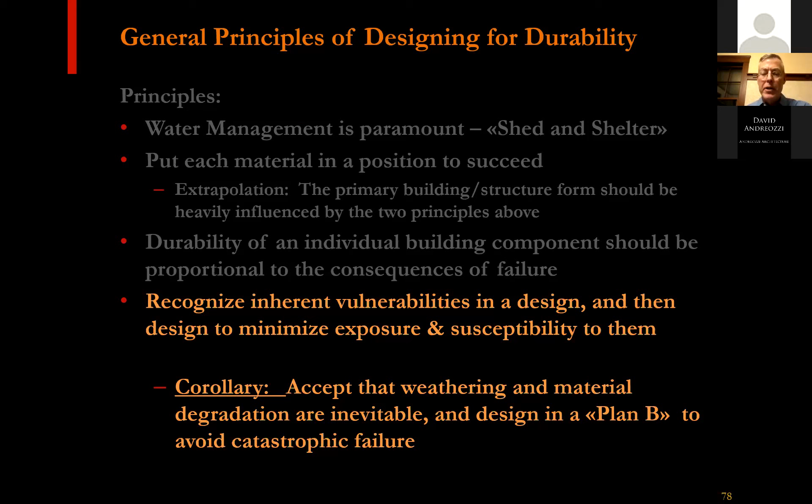And I would say the corollary to that is that you just accept that weathering and some amount of material degradation are inevitable, and make sure you design in a plan B to avoid a catastrophic failure when that happens.

So on the left is a close-up of an H.H. Richardson design building built by Norcross Brothers, a really good contractor in the late 1800s here in New England, and a Tuscan village on the right. So you can see a very sophisticated American builder in the late 1800s, and Tuscan farmers in medieval ages and beyond had the same idea.

They understood that you have large stones and you're building a load-bearing wall out of them. Rather than just have the kind of gaps that are irregular and get narrow at some point but really widen out, rather than have those be all mortar, because mortar will erode and degrade over time, especially in old traditional lime mortar, they've put in this sometimes called chinking, a lot of different terms for this in different regions and countries, but essentially they've hammered these chunks of stone or brick into those spaces.

To me as an engineer, what this provides is, even when the mortar erodes or degrades, you've still got point-to-point contact between all these stones, and it makes the wall reparable. Now, if you didn't have that, and all those things that you see that are brick or small stones were just mortar, the mortar starts to erode and big things shift around, walls start bulging, walls start cracking. It's just not as durable or reparable really over time.

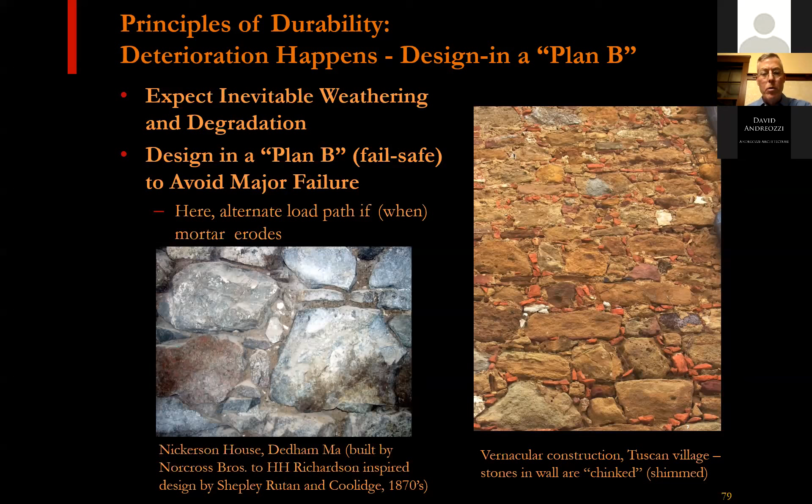So what the chinking really does, it creates an alternate load path point to point through the stones, even when the mortar's eroded. And we've kind of seen that time and time again in different buildings. It can be the thing that really makes those buildings do or die over time as mortar does inevitably erode.

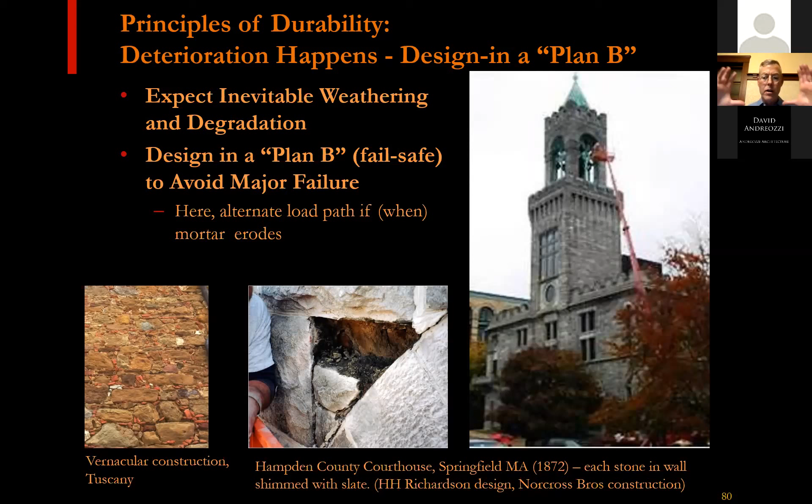So this building, an H.H. Richardson building, has a tower in Springfield, Massachusetts, 120 feet above the main entrance. There was essentially nothing left of the mortar when I got up there on that orange lift and started to look at it. But they had shimmed every stone, even though in this case they were ashlar, rectangular blocks rather than irregular rubble fieldstone. And that's really what saved that — anything from falling or collapsing despite the loss of the mortar.

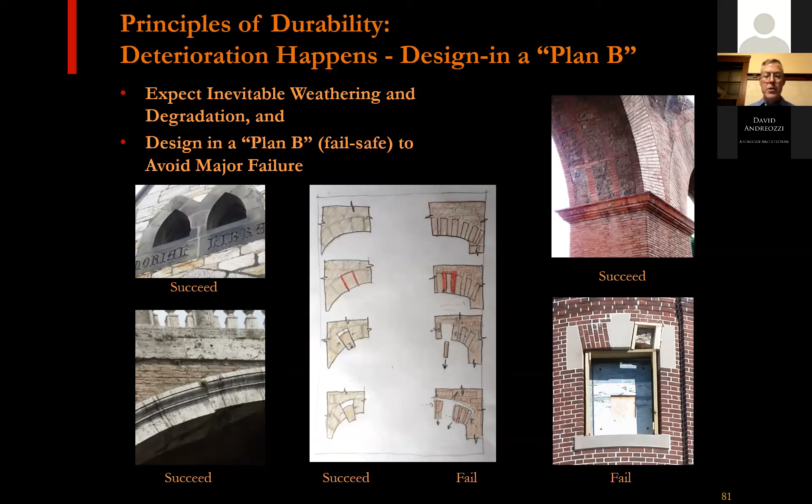This building at the right is a building in Boston that had very wide joints, and the brick was not wedge-shaped cut. So when that mortar eroded, the brick just dropped out, and a contractor put in those 2-bys just to avoid a further collapse or failure.

So to wrap up, I'd like to go back to Vitruvius and have him provide some closing thoughts. In book 1, Vitruvius told us what qualities a building must have to be considered architecture. So he set the bar quite high. Famously, he told us that all buildings, whether they're public or private, whether they're residential or civic or utilitarian, must have 3 qualities to be architecture. Not to be great architecture, just to be architecture, they must have these 3 qualities.

And of course, those are firmitatis, which he names first, which is durability, strength, soundness; utilitatis, which is usefulness and functionality; and venustatis, which is beauty. So he set the bar quite high for what it takes to make architecture today, and I think it's up to us to try to live up to it.